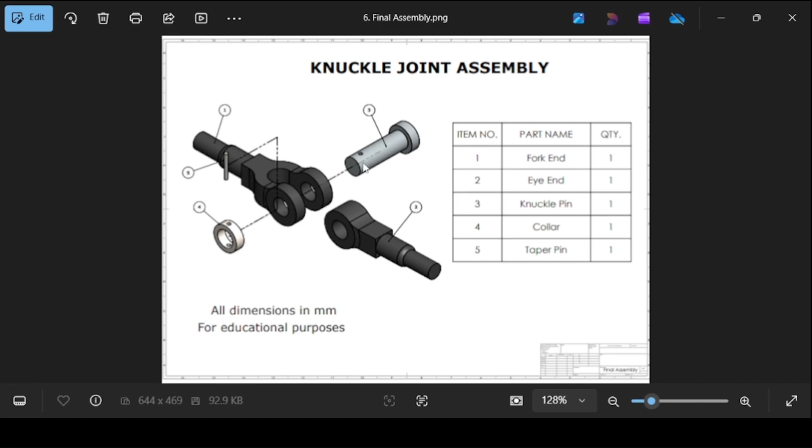So as usual, I have divided this tutorial into 3 parts. The first part, which is this video, looks at modeling the individual components. The second part, which will come right after this video, will be the assembly. And then in the third part, we'll look at creating an exploded view for the knuckle joint.

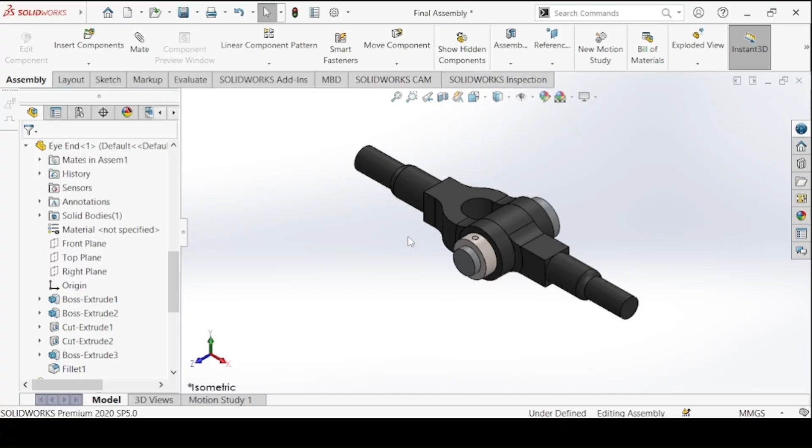We are going to start off in the SolidWorks window by creating a new file. So we start with the collar, which has a material of steel and these dimensions.

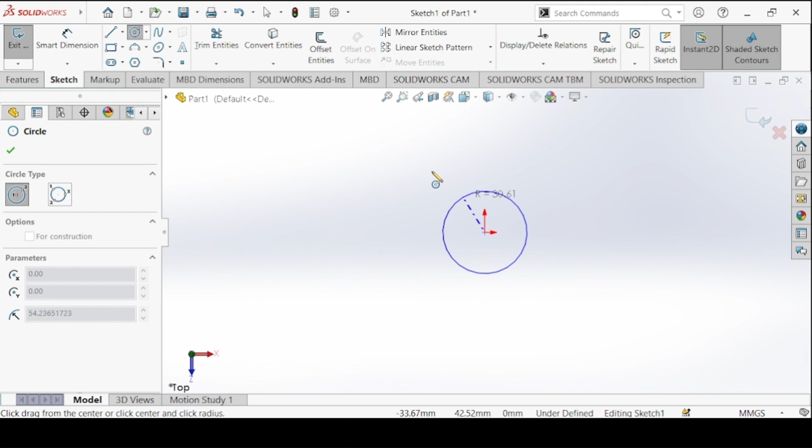Create a sketch on the top plane. We're going to have 2 circles with the same center on the origin, the outer diameter is 45, inner diameter 30.

Pardon me guys, my system memory is running low, so pardon me when this message pops up.

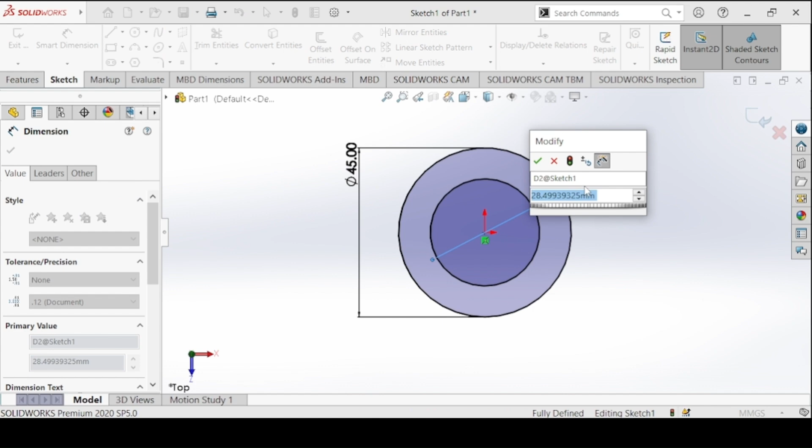The cylinder will have a height of 15 millimeters. So extruded boss base.

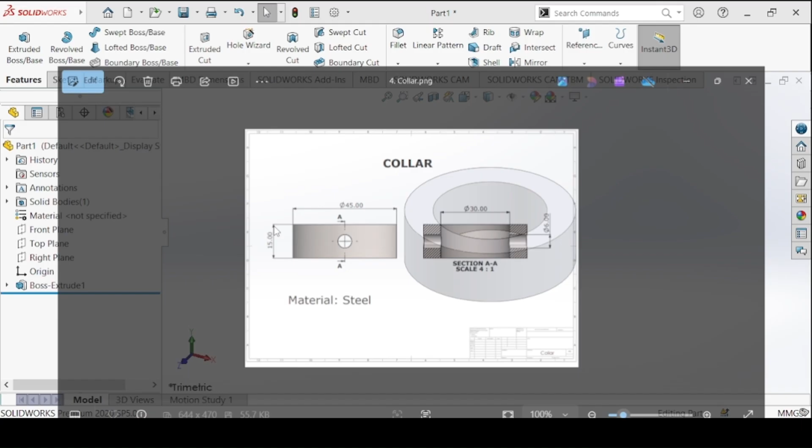We have to create a hole of diameter 6 through the whole part. Create a sketch, this time on the front plane, and place a circle at this center here. Extruded cut and set the end condition to through all, or both, to cut in both directions.

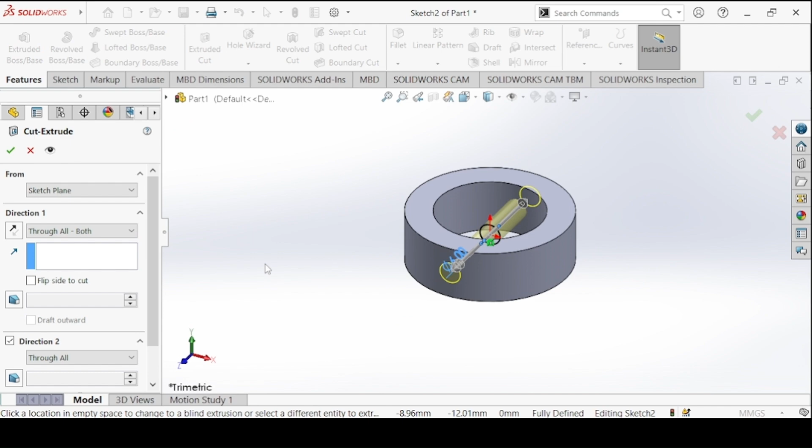Change the material to steel, go with the brushed steel appearance, and save the part.

We're going to save it on the desktop, create a new folder with the name Knuckle Joint, and this is the collar.

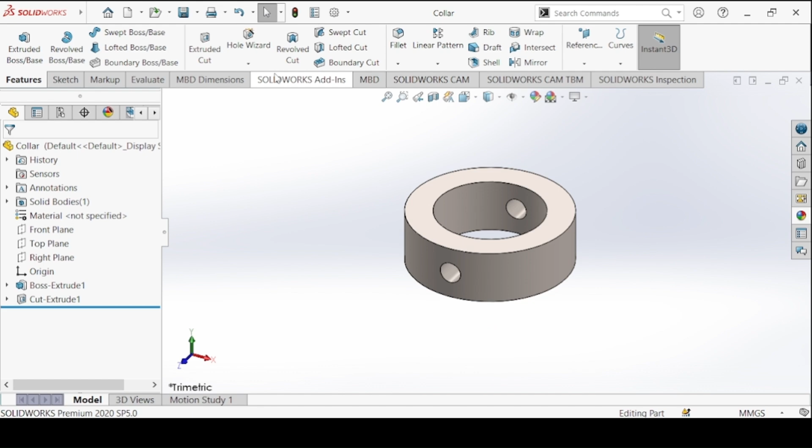We move on to the next part. Okay, so because of my memory, I'm going to close this part.

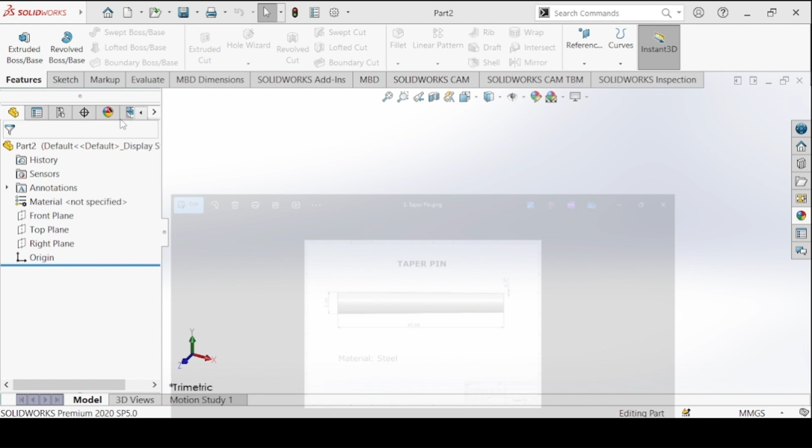Next, we create the taper pin. Since it's a round figure, we are going to use the revolve feature. We create a sketch on the front plane, and we need a center line for construction.

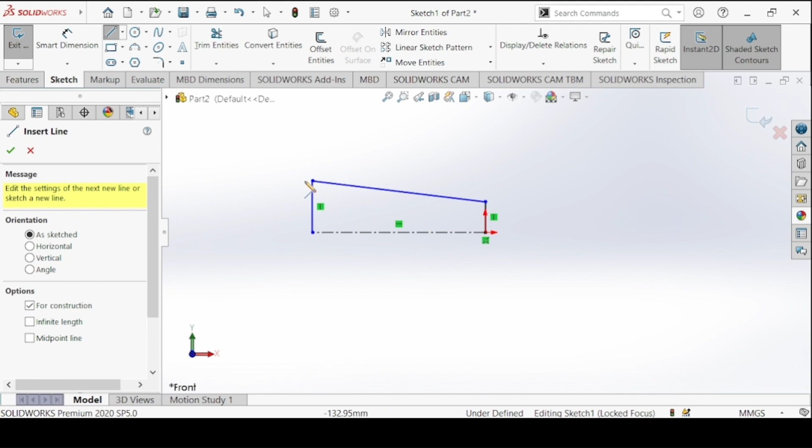Make sure this is slanted. And then for construction again, we create a horizontal line here, and the angle of inclination between these 2 lines is 0.5.

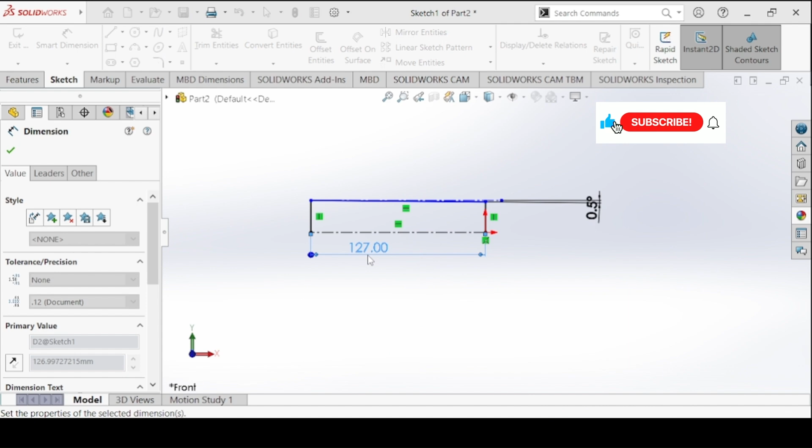This diameter is 6 and the full length is 45. Sketch is fully defined.

So use the revolve boss base. I'll zoom in and use this line as the axis of revolution.

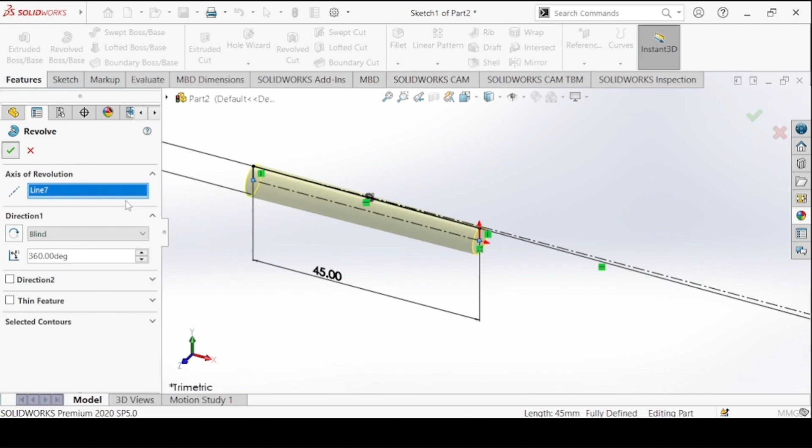Change the material also to steel, and then save the part. Save it and move on to the next part.

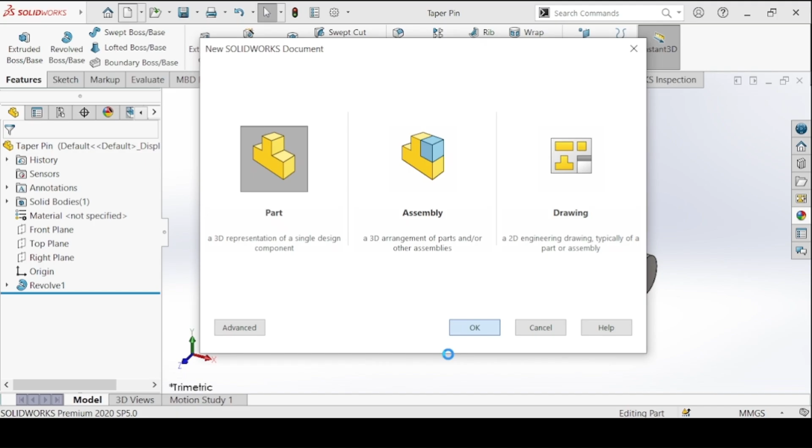The knuckle pin - this is also a round figure, so we are going to use the revolve feature. We create a sketch on the front plane.

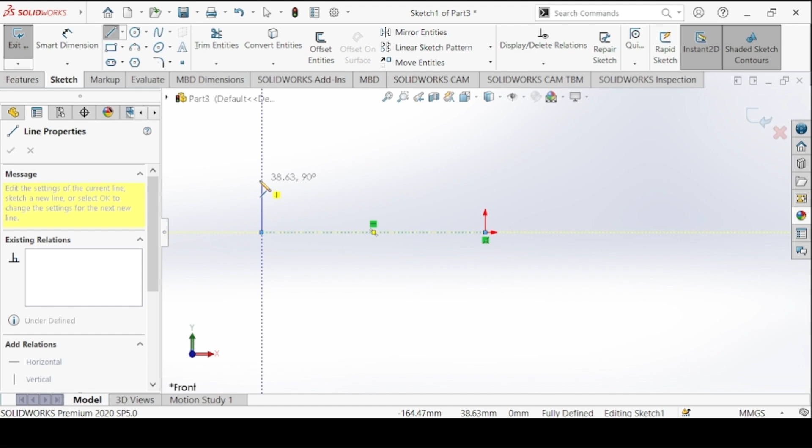First have the construction line we'll do the revolution around, and then we'll have the actual lines in this shape.

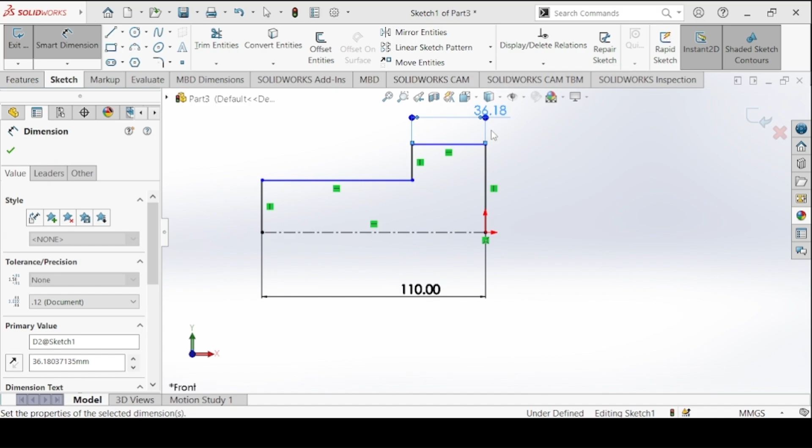The full length is 110. This length is 15. The diameters are 30 and 45.

And then revolve boss base.

We have a hole inside here of diameter 6, at a distance of 15.5 from the middle to the end here.

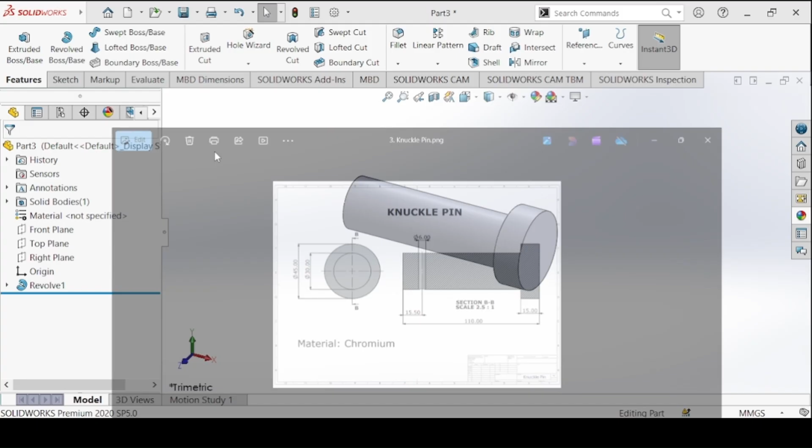I'm going to connect a line between this center and here, and you can see the horizontal relation - so this sketch is fully defined.

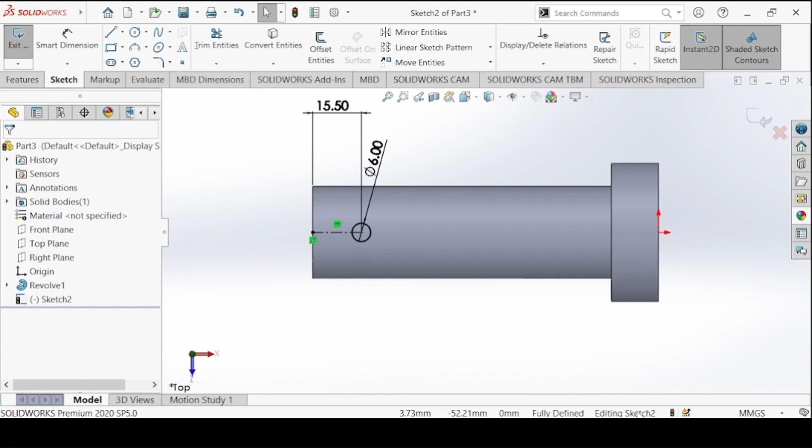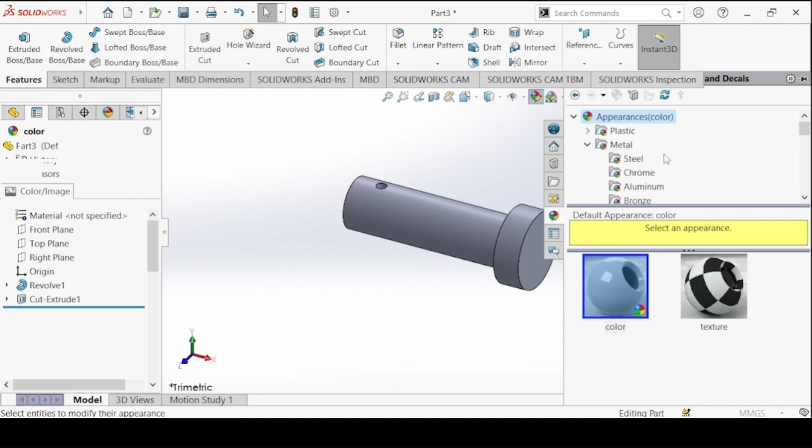Extrude cut and set the end condition to through all, or both. The material is chromium plate, and save the part.

I'll close it for my memory. And then we move on to the next part, the eye end.

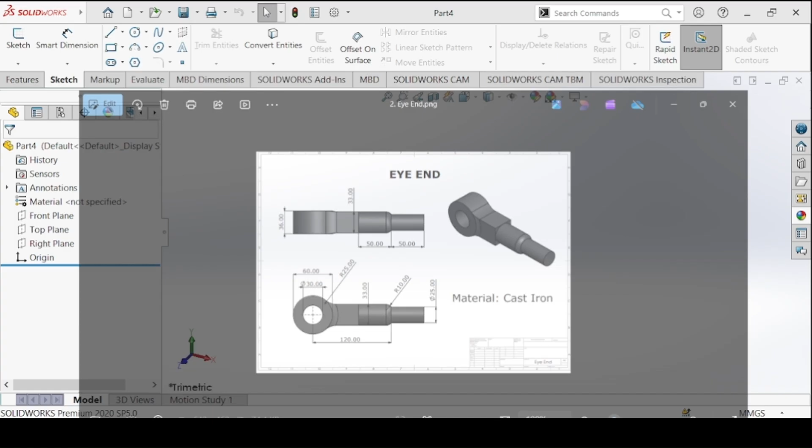We're going to create a sketch on the front plane and then extrude in this direction. So sketch on the front plane - again we have this message because my memory is running low. This circle has a diameter of 60 and the inner one has a diameter of 30.

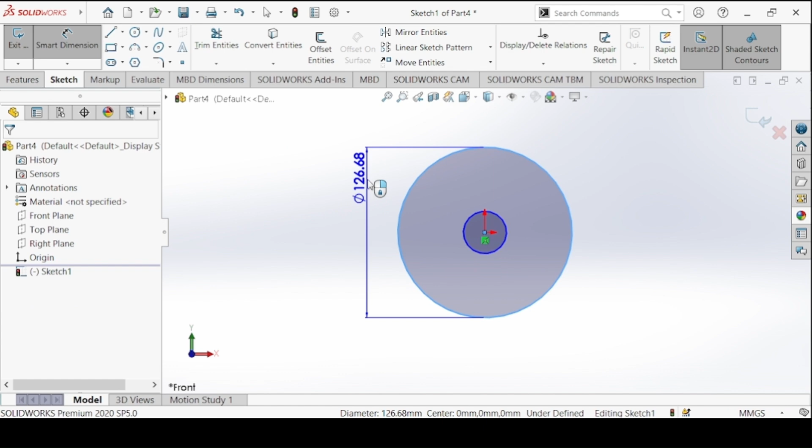So this rectangle, I'll make sure the center is coincident with the origin. The length of the rectangle is 120 and the width is 33.

So extrude boss base. We'll start with the outer circle, which has a distance of 36 for the extrusion. Click on this circle, end condition mid plane, and 36. Now drop down and click on the sketch again, extrude boss base. Now this rectangle, mid plane, this time 33.

Merge results and okay. Again, click on the sketch, extrude cut, and then the inner circle, end condition through all, to cut in both directions, and okay.

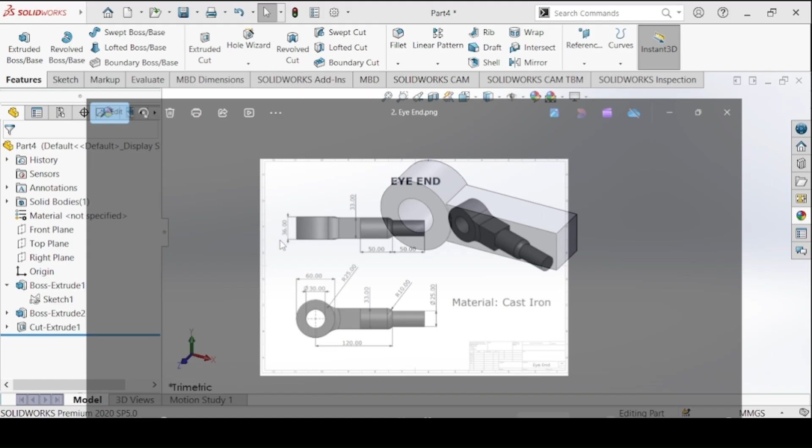Now for this part, we want to make sure we cut so that we have a cylinder left on this portion here. So extrude cut, and then on this face have a circle, and make sure that the circle is tangent to these sides. Hold down the shift key and click on the two entities, make tangent. Now exit.

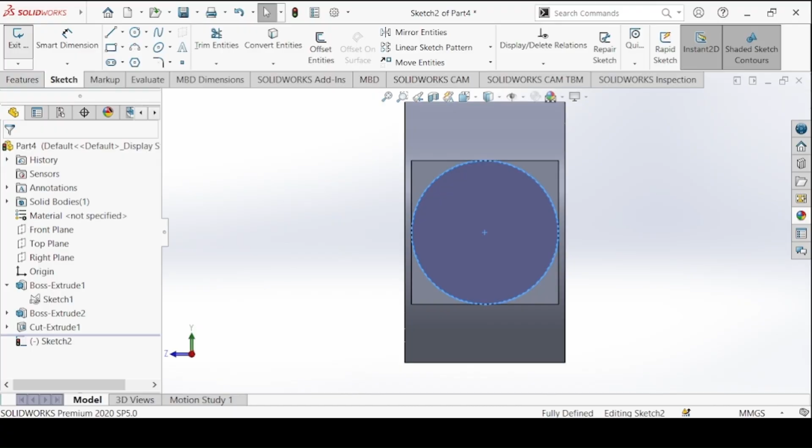The length, as you can see, is 50 millimeters. And then flip side to cut. Okay.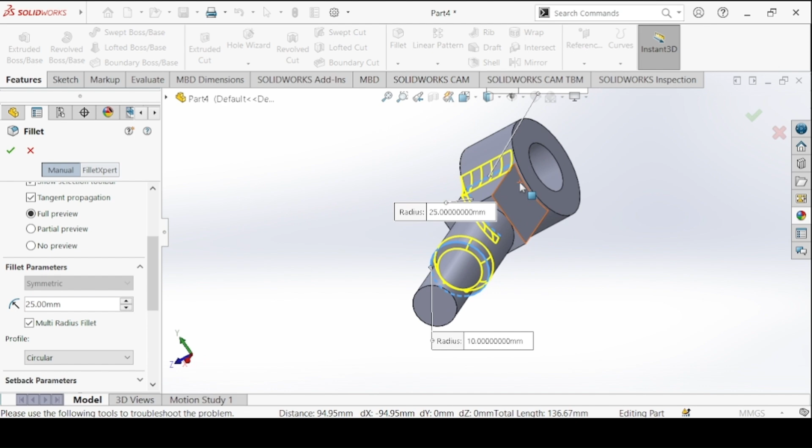We're going to have a fillet of radius 10 here, and fillets of radius 25 here as well. So use the fillet command, a constant size fillet and a multi-radius fillet. First 10 millimeters here, then 25 this time. So change this to 25, and click on these 4 edges. Okay.

The material is cast iron. And save the part. This is the eye end.

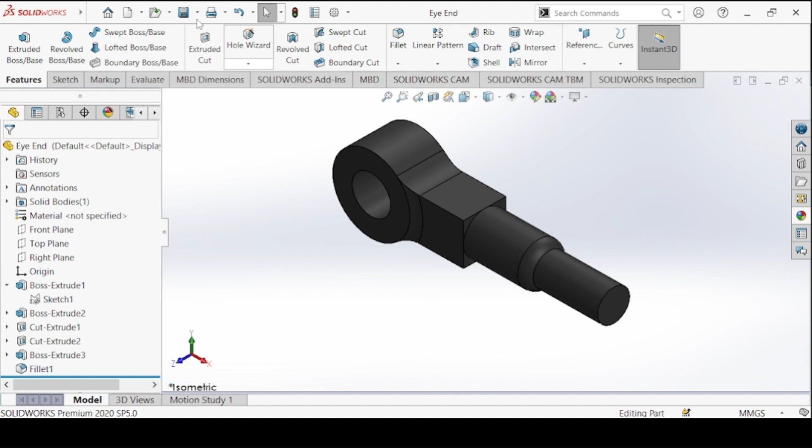Move on to the last part, the fork end. We're going to use a similar method as for the eye end. This time we start at the top. We'll create a sketch on the top plane.

We'll have a circle, and since the radius of this arc here is 36, we use the diameter for the circle, 36 times 2.

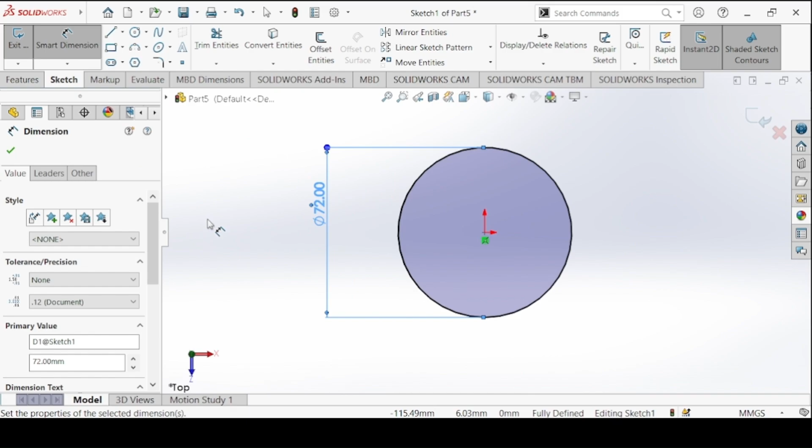Then we have a rectangle here. Make sure that the center of this line lies on the origin. So hold down the shift key, click on the 2 points, coincident.

The length is 109 and the width is 36.

So extrude boss base, and then click on this area, and this area, mid plane, and a length of 36. Okay.

Just as we did for the eye end, we are going to cut here so that we have a cylinder. So we sketch on this face a circle, and make sure the circle is tangent to the sides of the rectangle.

And then extrude cut, length again 50, and flip side to cut.

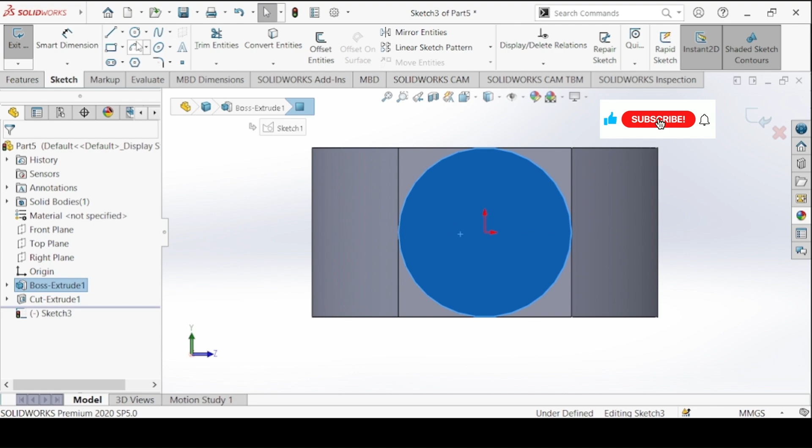Then we'll have a cylinder on this face as well, of diameter 28 this time. Again a length of 50, merge result, and okay.

Now we move on here. We make a cut inside here. So sketch on this face.

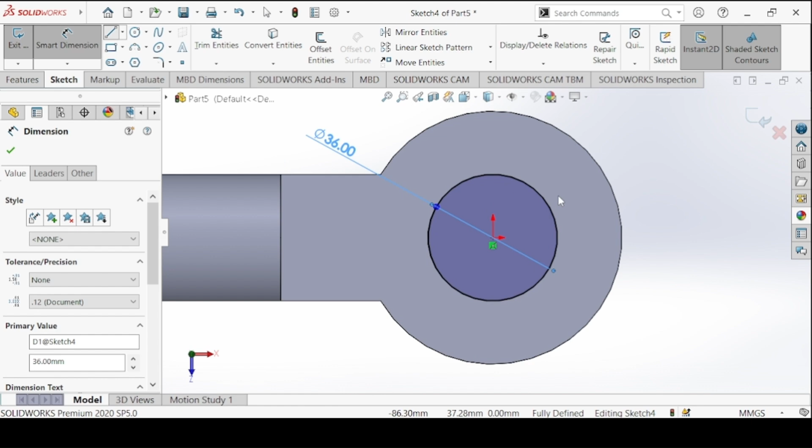First have a circle, and the diameter of the circle should be this length here, 36. Connect a line from this point to this circle. Make sure it's horizontal. Do the same for here.

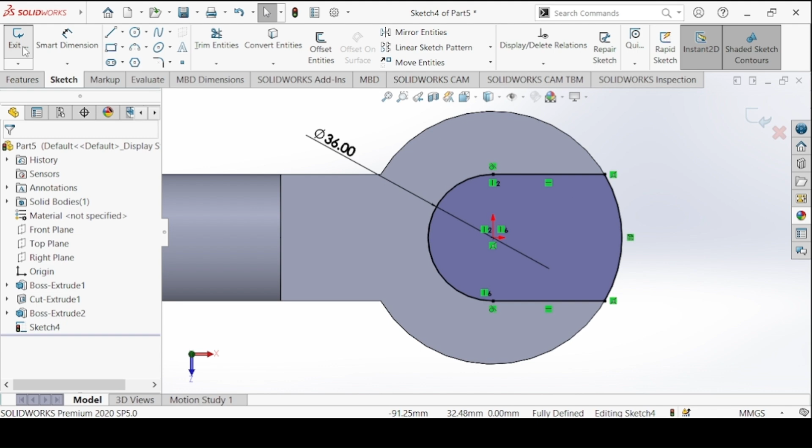And then convert this arc here into the sketch, trim so that you have this area selected, and then exit, extrude cut, set the end condition to through all, okay.

Then you draw a cylinder here and mirror onto the other side. Extrude boss base on this face, need a circle.

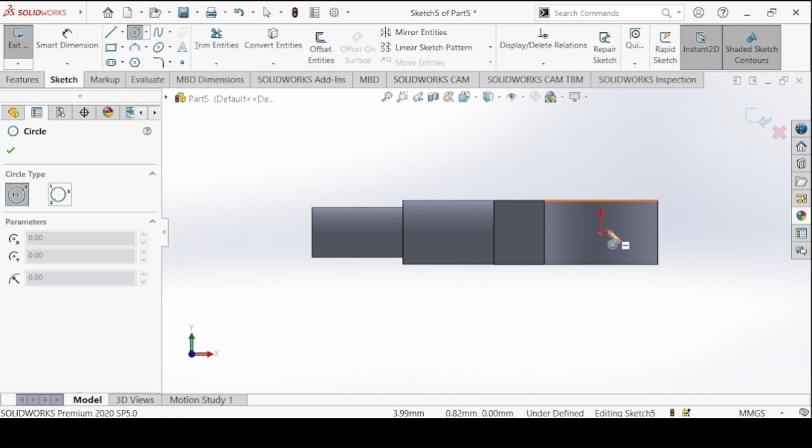The circle should have a diameter of 60. Make sure the circle is in the center. So hold the shift key, click on these two centers, make horizontal. And the distance from this center of the circle to this end point here is 147.

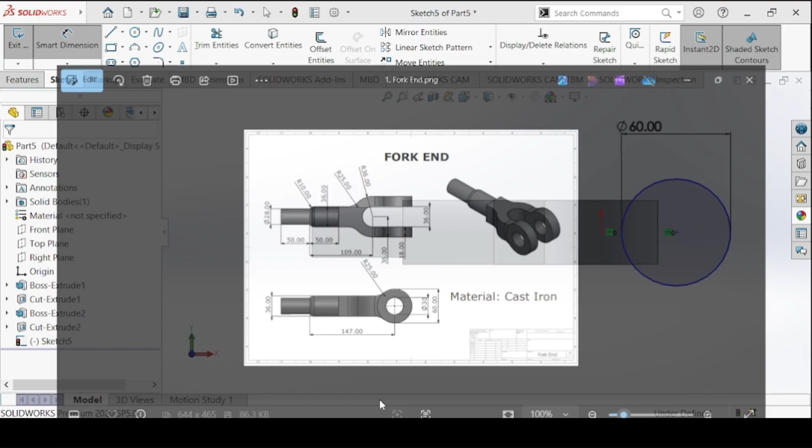And then the length is 18 for the extrusion. Reverse for it to come out here, merge result, and okay.

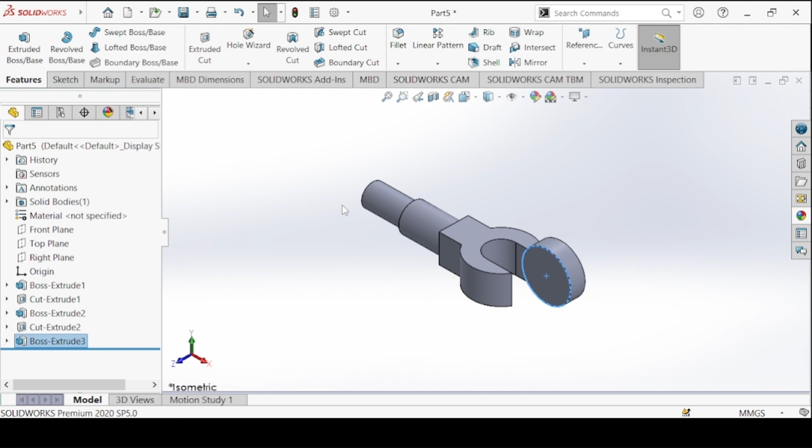Now click on this boss extrude and mirror. We are going to mirror using a front plane. Okay.

And then you create a hole inside here. In the center, the hole should have a diameter of 30. Extrude cut and end condition through all.

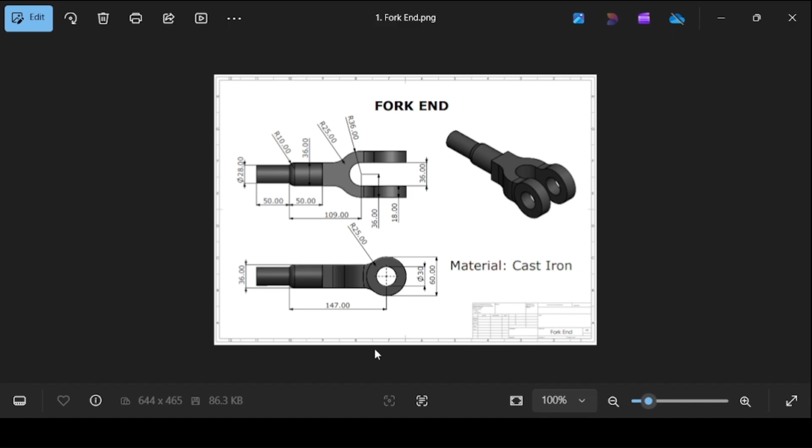Now we add fillets, radius 10 to this side, 25 to this side, and again 25 to this side as well. So constant size fillets, multi radius of 10 to this side, and 25 for the rest.

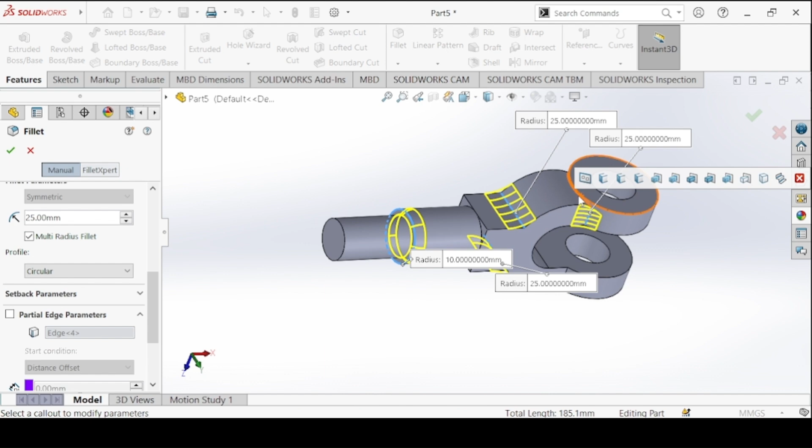Okay. And the material, we change it also to cast iron. Then you save the part. This will be the fork end.

So here we have modeled all the components we need. That is it for this part of the tutorial. In the next part, which will come right after this, we are going to create the final assembly. So I'll see you there.